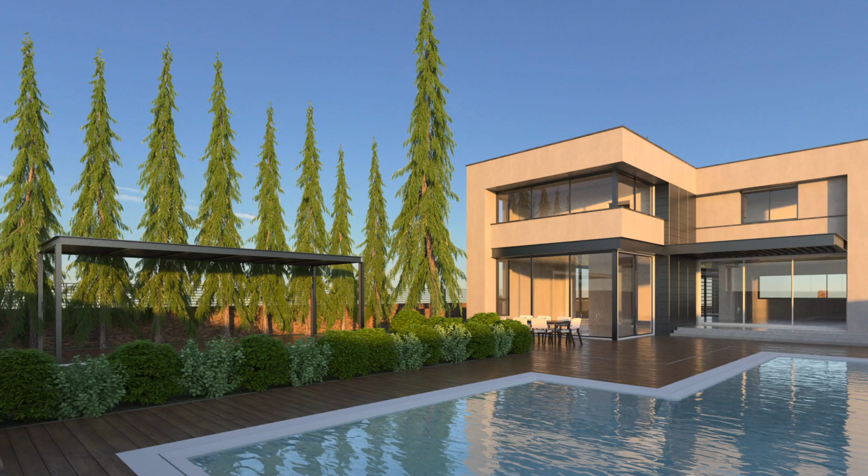This is the third and last part of this series. In this video we will use the functionality that Thea and SketchUp provide to stage our scene and create visually appealing images.

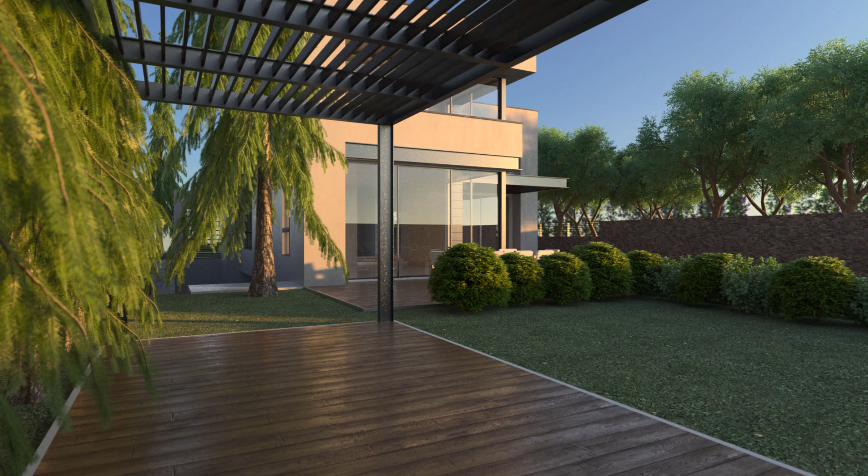We will start with a quick presentation of the rule of thirds and how to use it in our scene. The rule is used as a composition guideline in paintings, photographs and other fields. The image is divided into 9 equal parts with 2 horizontal and 2 vertical lines. The most important element of an image should be placed along these lines or intersections. By using this technique, the subject aligned creates more interest than having it centered in the image.

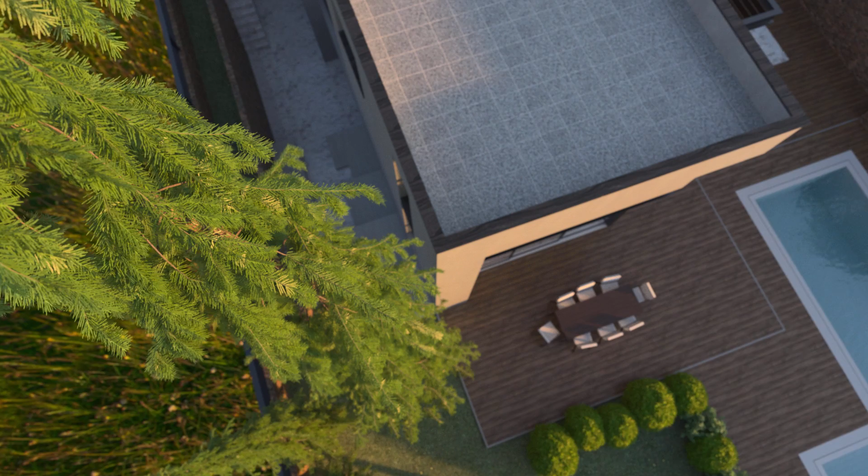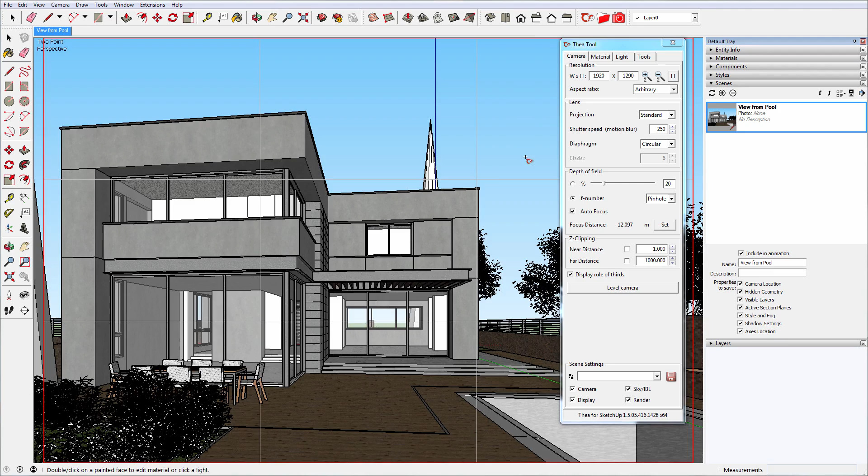We will now create 2 scenes using the rule of thirds. Let's create the first scene from near the pool. Leave the camera settings active and click on the Save button.

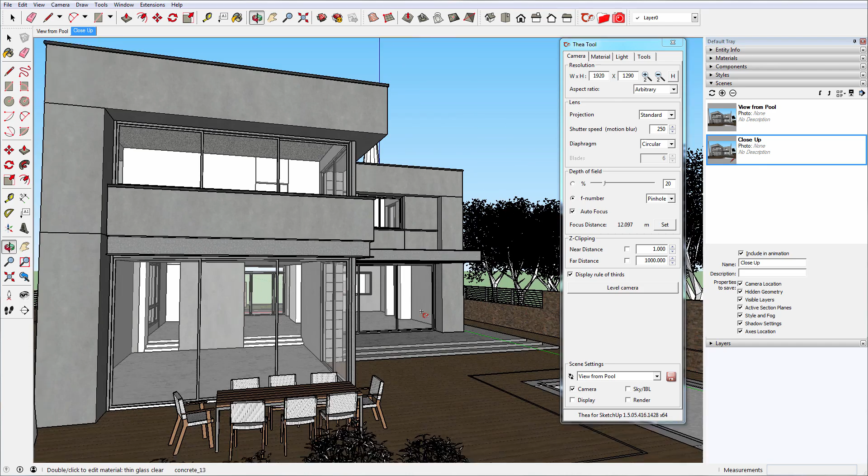Let's get on with the second scene. We will now change the camera frame from landscape to portrait by clicking on the H button. Click on the Save button with only camera selected for the second scene.

Thea for SketchUp has an extended functionality for SketchUp scenes. As we will see later on, this will come in very handy when rendering with the Batch Render tool. Now that we have created our scenes, we can go on and modify their settings.

So for the final rendering, we will use Presto MC in production mode and also lower the samples per pixel. Since these settings are not going to change between scenes, we will leave them unchecked. Let's have a look at the first scene.

For the depth of field to become active, we will change the F number to a value of 2. Now by using the Set button, we can click inside the viewport to define the focal point. For this scene, we will use the default display and IBL settings, and since they will be changed on the second scene, we're going to check everything but the render settings and click on Save.

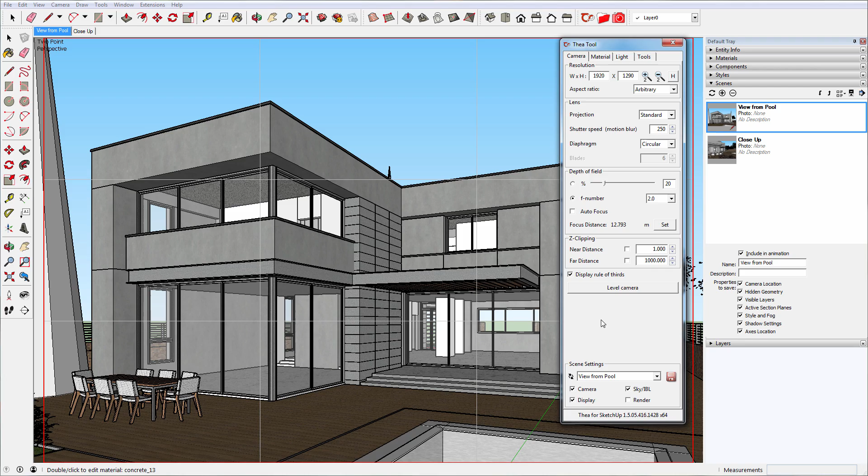Let's move on to the second scene. Once more, we need to define the focal point by repeating the previous steps. Let's open the rendering window now to make some changes to display and IBL. We will also rotate the environment map to create different lighting.

In the Display tab, we will lower shutter speed, enable CRF and add some vignette. For this scene, we will also check camera, sky IBL and display settings since they all changed in the scene, and hit save. We have now finished setting up the scenes and their settings.

We are ready to move on to the next part about the Batch Render tool.

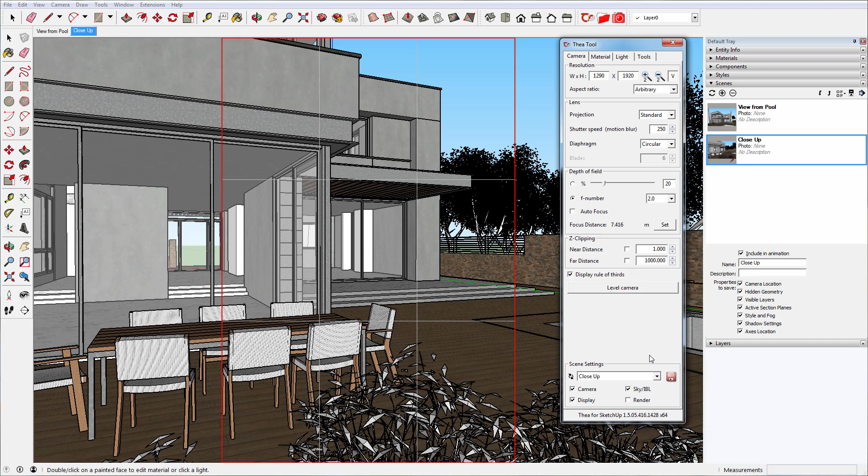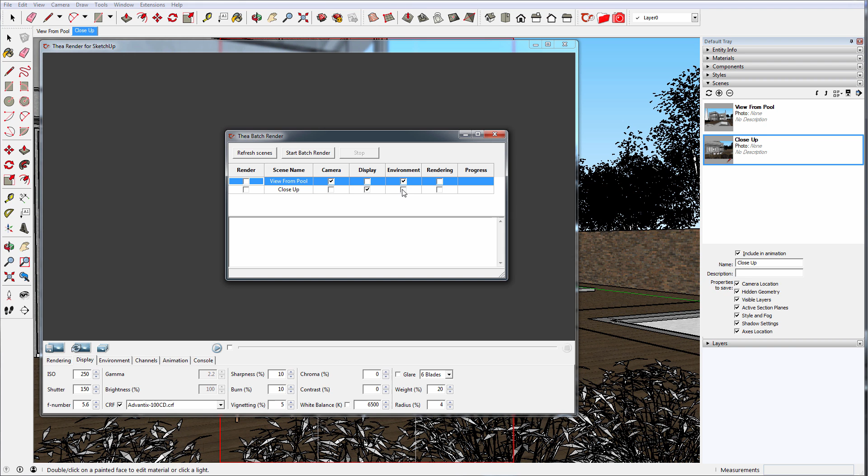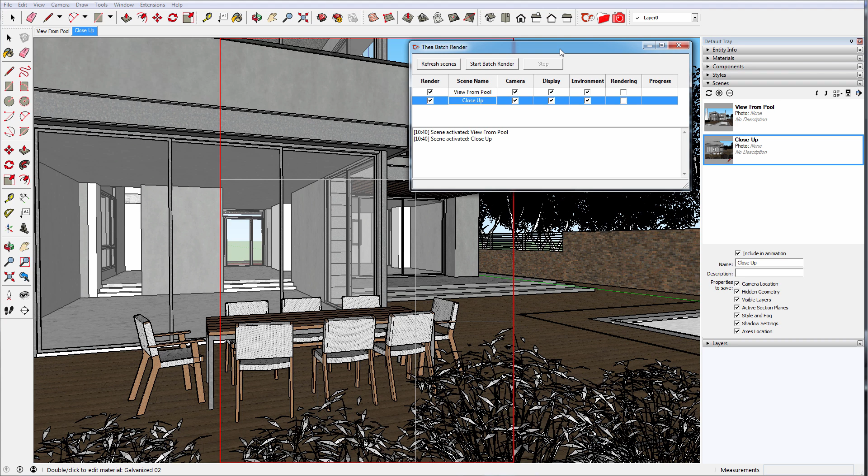You can also load each scene's settings by double-clicking on its name. We now need to select the 2 scenes and click on Start Batch Render button for the final renderings. The last step is for us to select the folder for the images to be saved in.

A quick note here is that the batch render tool adds the scene name word at the end of the file name. This word will be replaced later on by each scene's name. You can watch the rendering progress right inside the batch render tool. Batch render tool has more functionality that will be covered in an extended tutorial.